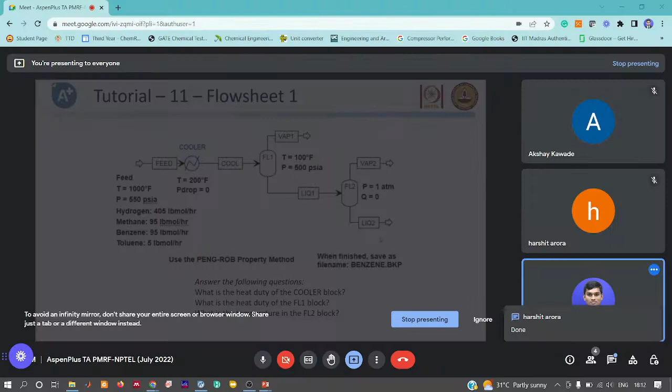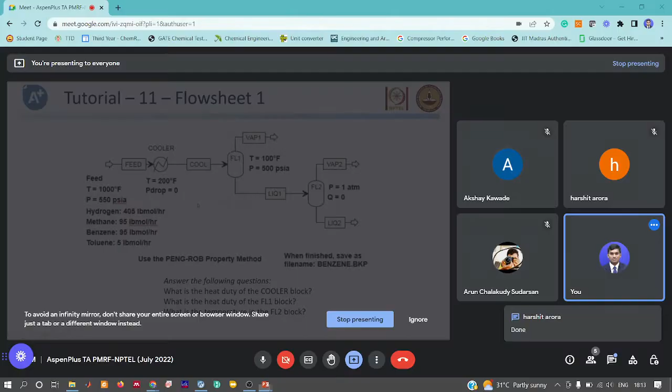Done? Finished? Great. Akshay, what about you? Just see, Harshit, if you have done some mistake. Akshay, you also completed. Great. Okay, let me also just do it. We'll compare our results, okay? Because I didn't, just give me just a couple of minutes.

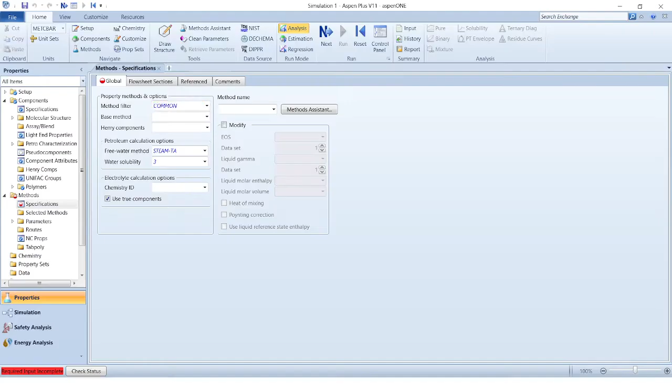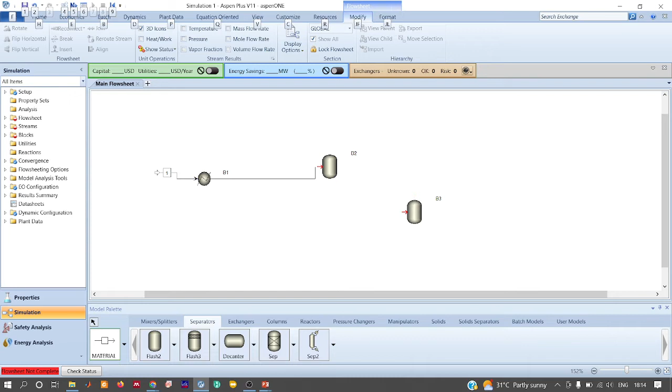Which property method is Peng-Robinson, right? Let me go to simulation. So all I have is 3 unit operations, right? One is this, another one is 2 flash phase separators, right? That's all I have, or do I have anything else? Nothing. So it's going here, it's going here, it says it's going here.

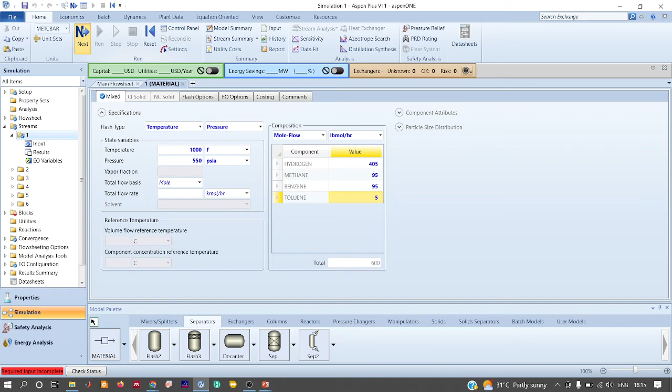That's all. So the feed stream is 1000 Fahrenheit, 550 psi. Right, it says hydrogen is 405. Which units? LB mole per hour. Okay, LB mole per hour. Hydrogen 405, methane 95, benzene 95, toluene 5. Done. Next, it says pressure drop 0 and outlet is 200 Fahrenheit. Just make sure that you give appropriate units. Sometimes it troubles a lot.

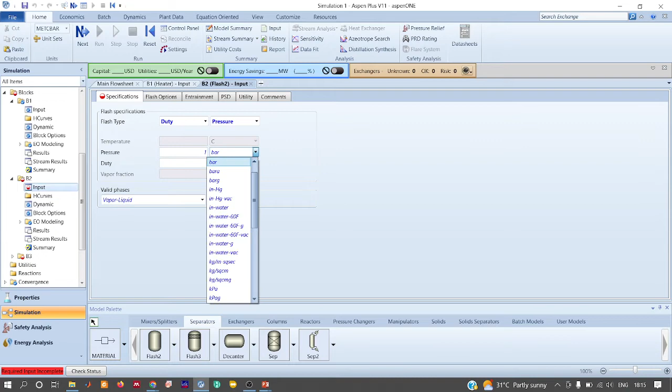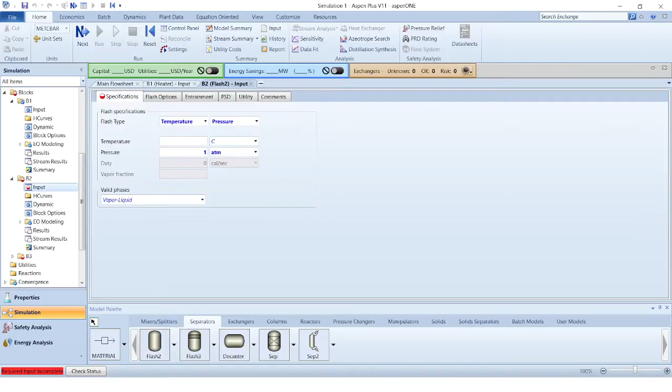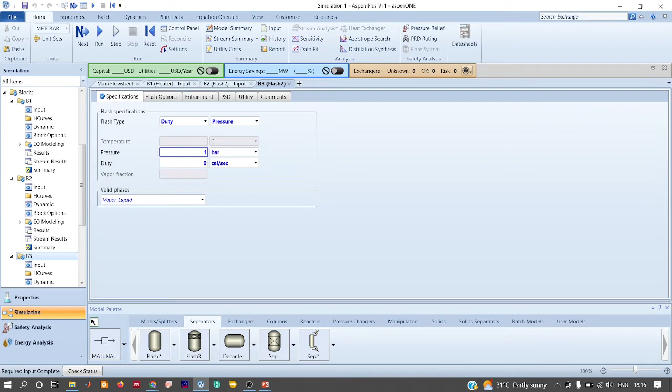This is the second phase separator. It says outlet is 1 atmosphere and heat duty is 0. Oh, I think I gave wrong value. Okay. This is the one. It says this is 100 Fahrenheit. 100 Fahrenheit and pressure is 500 psi. Right, it's given. Let's go to 4. Heat duty is 0 and pressure is 1 atmosphere. Great, that is satisfied.

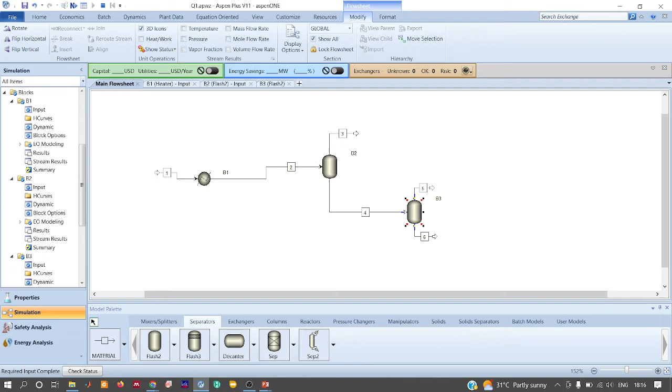Yeah, so the question says, what is the heat duty of cooler block, right? Let me put it in kilo. It says 2109 kilowatt. Is that what you got, both of you? Can you put your answers in the chat box? Oh, okay, Mr. Arun, this is the problem statement. You can take the screenshot of it. It's a simple problem. You have only 3 unit operations. Maybe from second question you can join with us. Both Akshay and Harshit, can you just put your answers, whatever you got? Okay, yeah, that's what I too got.

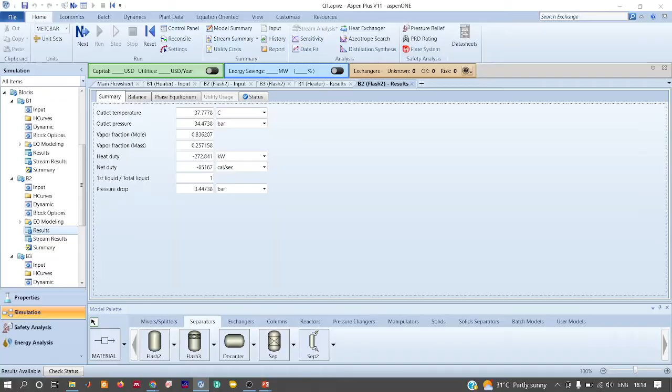Great. And the second question is heat duty of the first phase separator, right? So let us see. So heat duty in kilowatt is 272.8. Is this what you got? Okay, great. And the third question is temperature of FL2. It's straightforward, right? I think for this one we don't have to do any simulation because T4 and T5 will be the same, right? So it's 37 degrees centigrade. Or if we put it in Fahrenheit, it will be close to 100. Fine. Okay, so let's go to the next question.

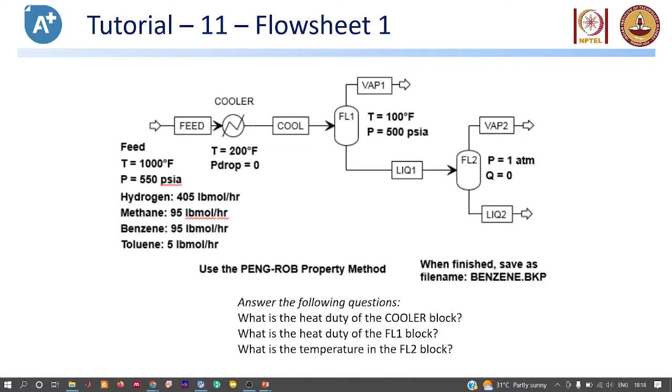Okay, so we have a process where we want to extract acetone from water. That's our aim. We are using MIBK for that. So in this case we are using two decanters in series for separation. It's like a two-stage separation. So I want you to just start the extraction process simulation. First initially just give the components. We are interested in acetone, water and MIBK, methyl isobutyl ketone. So the flow sheet is given over here, and the required input data is also given. So the question is clear, right? Does it require any explanation or is it self-explanatory?

I want you people to simulate only this part. Just add a mixer and a decanter, leave the rest. Just tell me once you have simulated this section, the first mixer and the first decanter. Don't set the entire flow sheet, just two of them, because I'll also do it parallelly. And initially use ideal equation of state for calculations. I have few questions. The question is, ensure that you have chosen ideal property method, run the simulation and tell me what you observe with respect to separation, and give me the explanations for results obtained using ideal equation of state for the first decanter itself. Don't worry about the rest, simulate only this section of the process.

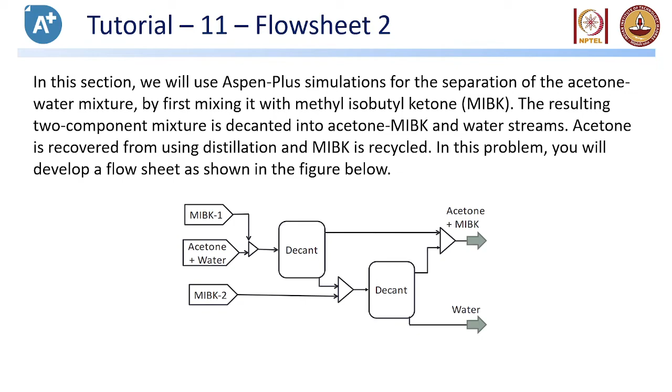MIBK is methyl isobutyl ketone. It's here, see? I'm just pointing it out. Methyl isobutyl ketone. Okay. Just only simulate the first section, the first mixer and the decanter. Just put a message once you have completed simulating these two unit operations, and use ideal equation of state.

Don't worry about the warnings. One of the questions asked for you is, explain why you are getting some warnings. So I want you to interpret the results. Simulating Aspen is like click click click business, but it's important to interpret the results which you get from Aspen. So the first idea is to use the ideal equation of state and try interpreting results and then change the equation of state. So initially use ideal and explain why you are getting warnings and all. Okay.

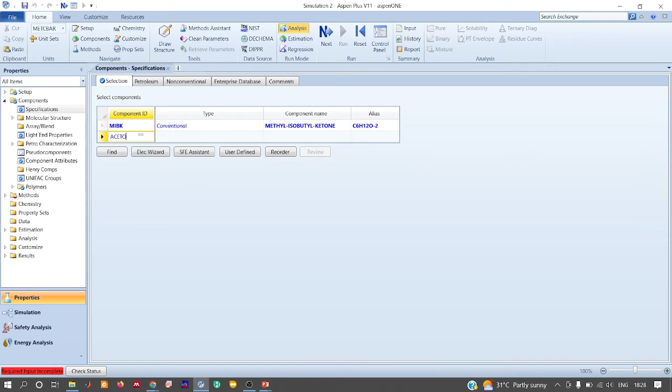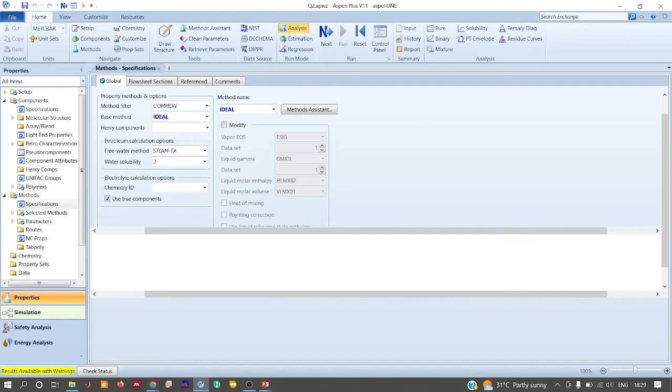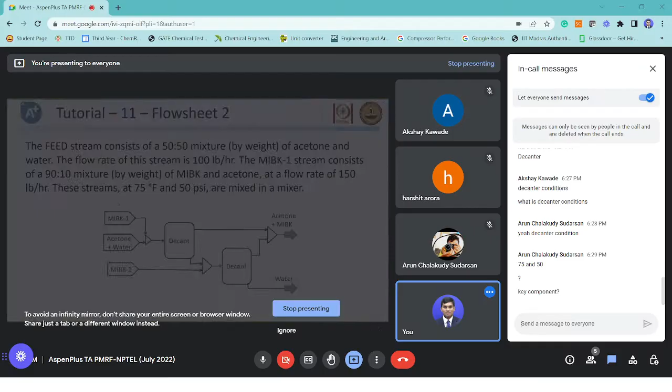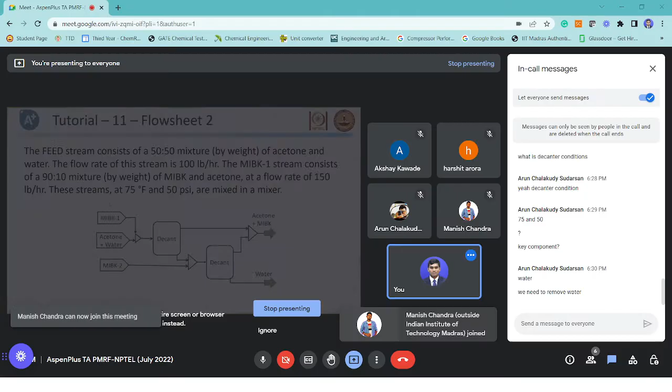What do you think? Which one is the key component? See, I intentionally didn't give some of the information. Okay, I want you people to think what should be the key component. We need to remove water. See, our basic aim is to separate acetone from water. Okay, so what becomes our key component?

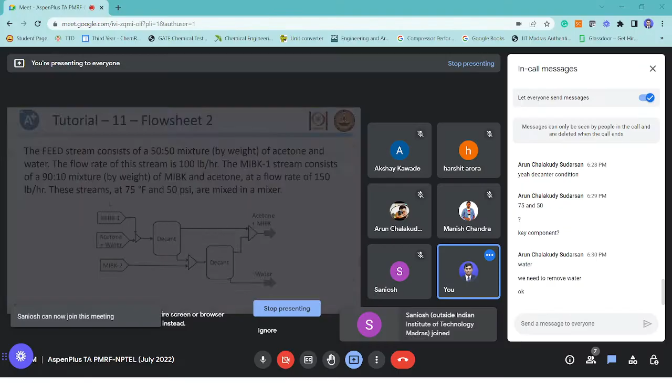Okay, Harshit says no phase split occurs. It's actually a valid point. When you do a proper simulation, you will observe that there is no split. Even Akshay also pointed out. Okay, fine. So there is no phase split. What does it mean? Can you interpret it? There is no phase split. Why aren't we getting any phase split when you use decanter? Why can't this operation happen?

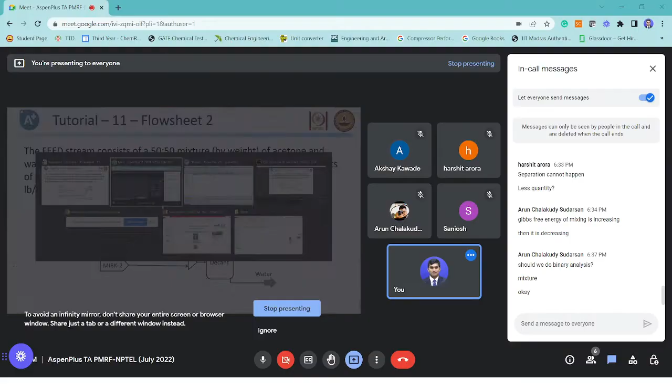Why do you want to do a binary analysis? No, don't do. See, for the same flow sheet which you have created, which has a mixer and a decanter, instead of using ideal equation of state, now use NRTL, and then see whether the results you obtain still remain same. And just put a comment. What result did you observe in this case?

Now getting separated. Okay, thanks Harshit. Others, what do you observe? Results available without errors. Great, thanks Akshay. Now can you tell me why you are able to separate when you are using NRTL equation and the separation isn't occurring when you are using ideal equation of state? Just try interpreting this result.

When you are using ideal equation of state, you don't have separation. However, when you are using NRTL method, you are able to have the separation. So how do you interpret this result? Can someone just respond? What's your opinion? Because it's a liquid, so what? It's a liquid, fine. I'm using gaseous equation of state for liquid.

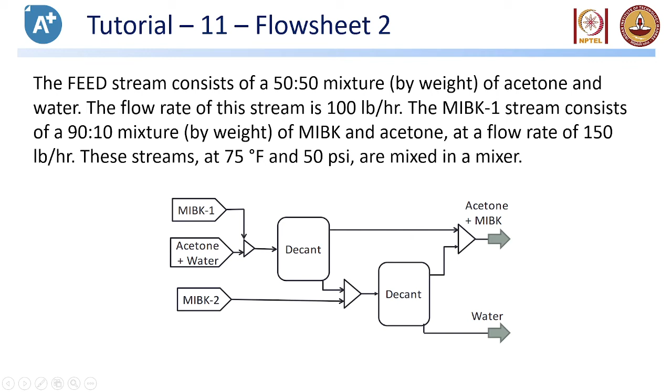Okay, let's continue further. Now take a separate stream of MIBK. Let me just post. This is one I have done, right? Okay, so add another stream. This has a flow rate of 50 lb per hour. Put it to the mixer and then a decanter. Can you do the rest of the process?

Okay, great. Thanks, Arun. What about Akshay? Akshay, please let us know once you are done, okay? Others, please wait for Akshay. Let him also complete.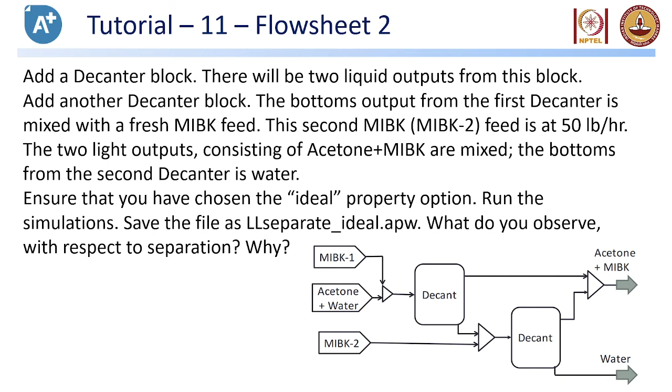Oh, okay, your simulation got deleted. Okay, fine. We'll just add some more things to this flow sheet. You just carry on. So now, what I want you to do: can you just tell me what fraction of acetone you are able to recover from the initial acetone-water feed? Just put a message. What fraction of acetone are you able to recover?

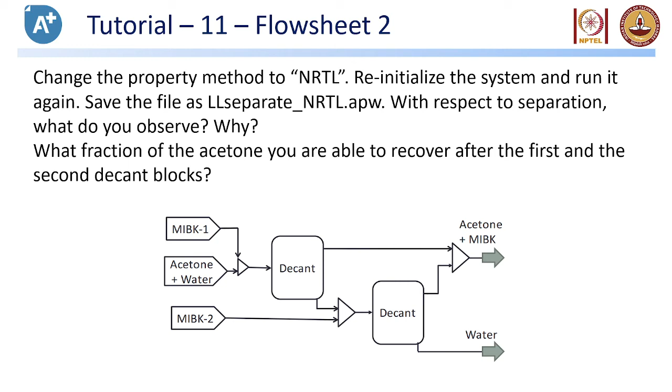Okay, 20. Okay, now for this setup, can you add a RadFrac here? The outlet, whichever you are taking, just add a RadFrac, which has got two products, one taken out from the top and one from the bottom. Okay.

So the mixture, this stream is the acetone plus MIBK stream which is coming out. Send it to the RadFrac. I'll just tell you the specifications of the RadFrac. Just give me a minute. I want you to connect it and then I'll give you the specs of the column.

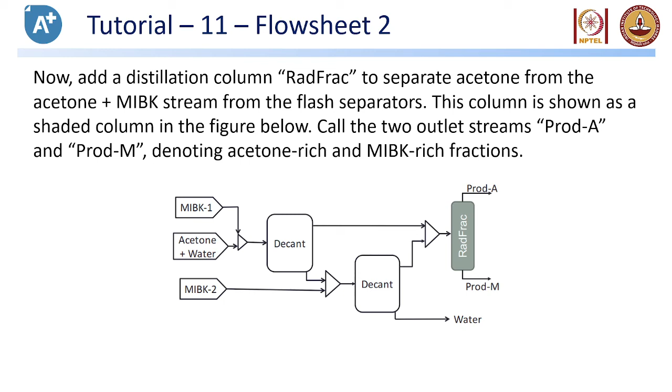So these are the specifications of the column. Use 12 trays with the inlet at the 6th tray. Choose reflux ratio to be 1.3 and the distillate to feed ratio as 0.9, and condenser pressure as 25 psi. Okay. And after doing that, can you report answers for these questions?

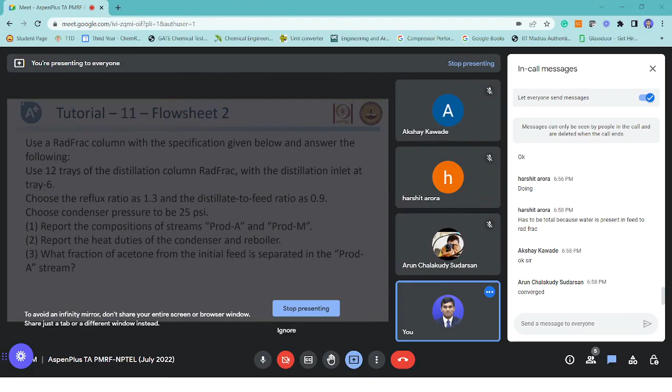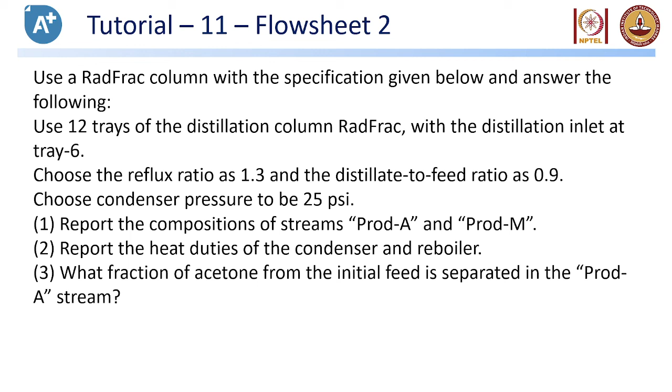Okay. Great. Good, Arun. Yeah, I don't want to discuss the answer in today's class. Anyway, I'll come up with the direct solution next week. I actually planned another flow sheet today as well, ammonia production, but we'll get started with that in the coming week. So the coming session will be your final session, and we'll discuss some more things, some flow sheeting, etc.

So, shall we hold this lecture here today and come back next week? Okay, that's great. Then see you next week. That will be our final class. Yes, we'll actually discuss more on design spec and optimization. One flow sheet, and in that flow sheet itself we'll try doing a design spec and optimization. So that's how the coming week's session will be.